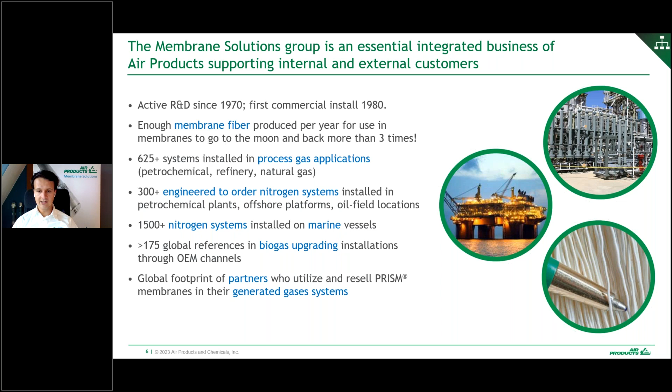While biogas is still upcoming in all the markets, also in the US, we've been active in biogas upgrading and R&D projects since 1994. Actually, even before that, some real pioneers in 1983 did some membrane testing on landfill gas upgrading.

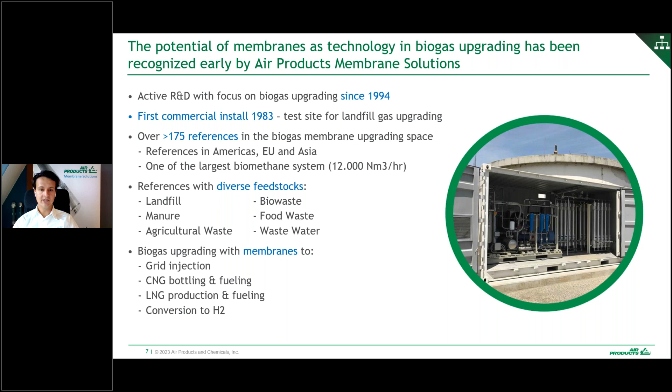The real increase in production and in biogas upgrading started in 2012. We currently have over 175 references in the US, EU, and Asia, with diverse feedstock knowledge: landfill, manure, wastewater, biowaste, as well as diverse utilization. So grid injection, CNG bottling, conversion to hydrogen, LNG production, and one not mentioned here is CO2 liquefaction.

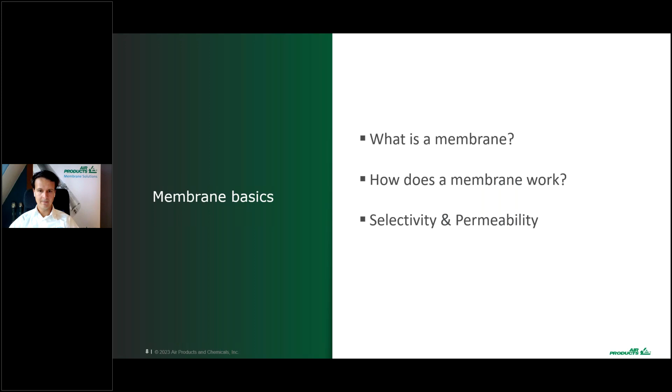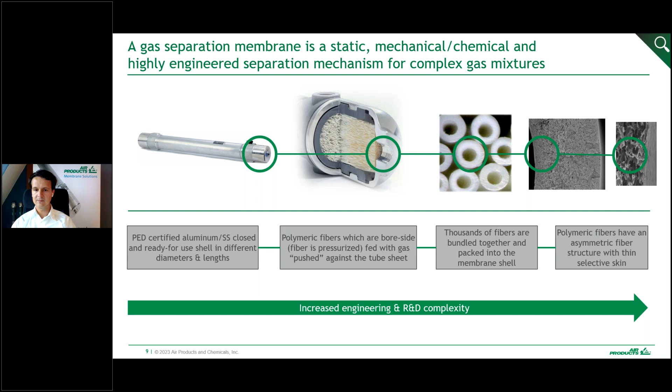Membrane separation is primarily intended to separate methane and CO2 from each other, where CO2 becomes the permeate, on the low pressure side, and methane becomes the retentate or non-permeate. Methane is considered a slow gas, while CO2 is a faster permeating gas. Slow gas means that it permeates very slowly through the fiber and wants to stay in the fiber. A fast gas permeates really quickly through the fiber.

Separation of nitrogen and methane is almost not possible with the current polymeric membranes on the market because they have the same characteristics; they're both slow gases. H2S and oxygen are intermediate gases in terms of permeability, and therefore can be separated at a specific rate. The retentate stays on pressure, and the permeate will experience a pressure drop versus the feed. Next, please.

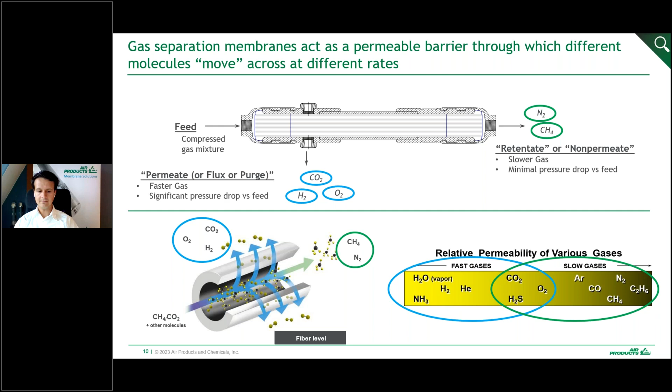The main membrane characteristics are permeability, the amount of gas that can go through the membrane, and selectivity, how good the membrane is at separating the molecules, primarily methane and CO2. To make it more visual, I always compare it to the door policy of a nightclub. A high permeable membrane means there's a big door where a lot of gas can go through. Low permeability means a small door, so you cannot push that much gas or people through.

High selectivity means there's a door policy. They check your ID at the gate and don't let everybody through. With low selectivity, they basically let anybody through, or it's easy to get in. Next, please.

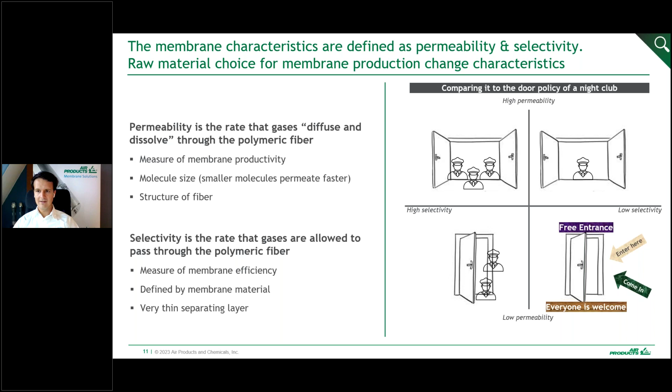These were the membrane basic characteristics in a very quick, high-level overview. However, there are many more variables that make a successful membrane RNG upgrading plant. Those variables are pretreatment, the membrane configurations, because we looked at a per-membrane basis but you need to configure them in a specific setup to achieve a certain performance, and operating variables. So how can I play with my plant to achieve a certain performance? Next, please.

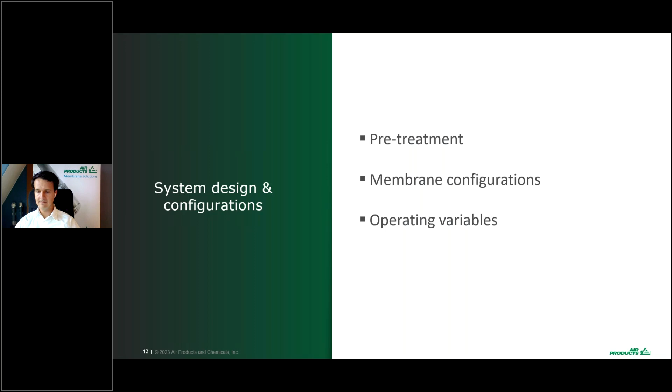Pretreatment is key in the membrane performance. Everybody here knows that the raw biogas is not just methane and CO2. There are many, many byproducts. Among them are, of course, moisture, H2S, ammonia, oxygen, nitrogen, volatile organic compounds like VOCs, siloxanes, particles, oil, and many more that are there in certain amounts.

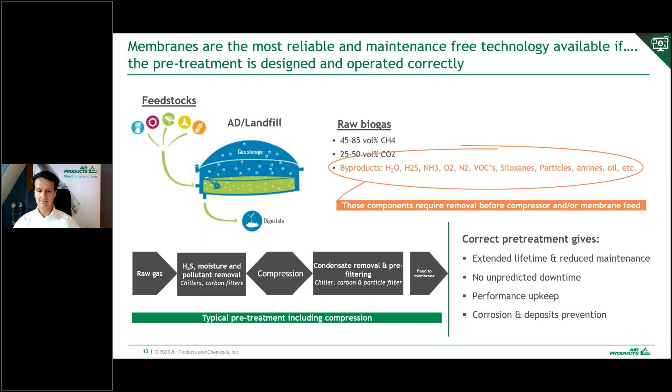However, these components require removal before the compressor, that's a piece of equipment you want to protect as well, and/or the membrane feed. If both components, the compressor as well as the membrane, would fail, then you basically experience unexpected downtime. So it's very important to remove these. Removal of these components can be done by activated carbon or chillers or other types of filter media. Next, please.

Besides the membrane characteristics, the way the membranes are lined up is essential for meeting a required performance. We call the way membranes are lined up a configuration, where membranes are put in stages. A stage can consist of multiple membranes. So if you talk about the first stage, it can be 4 or 5 membranes. A second stage can also be 4, 5, 6, or multiple membranes.

The most simple configuration is a one-stage configuration, which you see in the top left picture. Basically, it is one membrane stage that consists of multiple membranes that separates the methane from CO2. Here the CO2 purity is relatively low, and the methane recovery is relatively low as well. More common configurations are on the right: the 3-stage cascaded, or the 4-stage cascaded on the complete right.

The first stage is always the bulk separation. Here we separate the majority of the CO2 from the raw biogas stream. The second stage determines the methane purity. So what purity do you need? Grid injection? This stage defines it. The third stage actually defines the recovery. So of every molecule I feed into the system, how many molecules can I recover? Any additional stages in series, cascaded or parallel, basically increase methane recovery and methane purity, but they also add process complexity. Next, please.

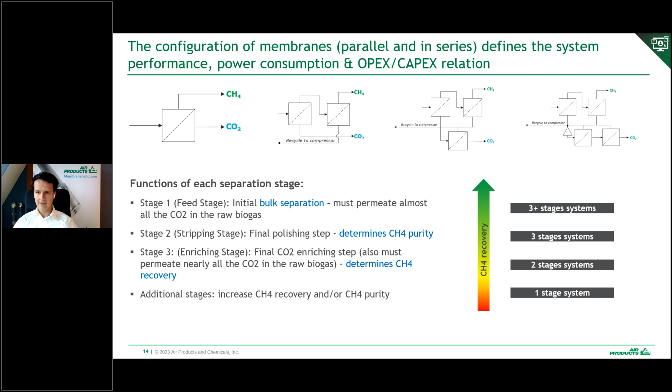Now we've discussed the membrane. So you're going to pick a specific membrane with a specific separating characteristic, say, a membrane with a high permeability and a relatively high selectivity. You picked a configuration, let's say a 3-stage configuration, and now you have an existing plant. These are design parameters you can pick up front. Now you're going to have two controllable parameters, temperature and pressure, and they determine the performance efficiency of the membrane configuration. By playing with these, you can optimize CAPEX and OPEX, so capital expenditure and operational expenditure of the plant.

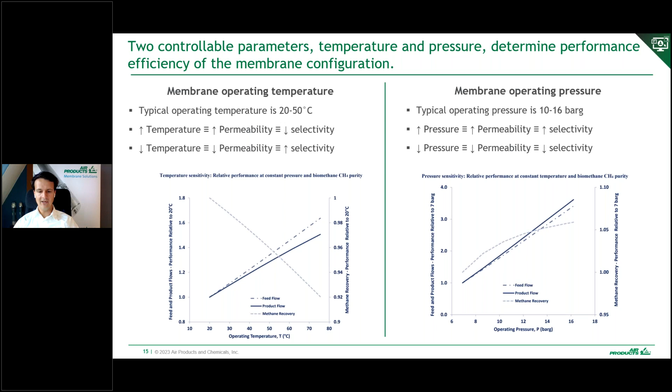The effect of increasing pressure is to eventually decrease membrane count. An increased pressure gives an increased permeability and an increased selectivity. In other words, you reduce the number of membranes you require for the same flow. Temperature, on the other hand, has an opposite effect. Increasing temperature increases permeability and decreases the selectivity. You can make the comparison to pores. You heat it up, the pore becomes bigger, so the molecule can more easily go through the fiber. So more gas can go through it, but the selectivity decreases. So it's crucial to pick the right operating temperature and feed temperature of the membranes in your design phase. Next, please.

Choosing the most efficient configuration. A lot of people ask me all the time, just give me the most efficient configuration. Well, my question back to them is always, define what's efficient for you. It's always a trade-off between operational costs and capital costs. Also, some considerations and factors that can influence your design are, for example, law, legislation, or wanting to benefit from local incentives like the IRA. There's intellectual property you need to take into account. You are limited to a physical footprint. All these factors play a role in making the right configuration for your RNG project.

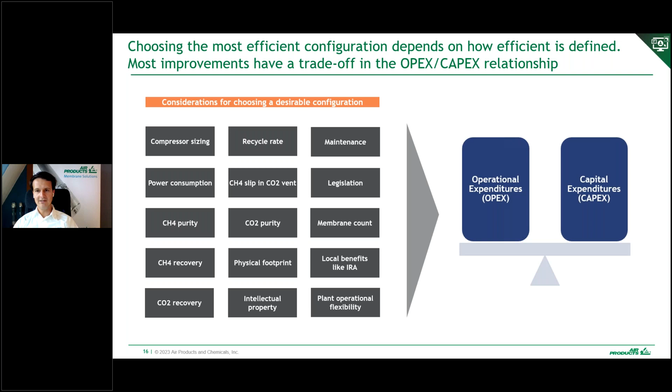So while membrane upgrading is the most dominant technology in both the EU and the USA, with roughly 50% of the RNG projects utilizing membranes, there are many other techniques available on the market that can also be used in biogas upgrading. I'm going to scan roughly through the competing technologies, as well as how they compare to each other. All technologies have a role in the market and they play their part. Next, please.

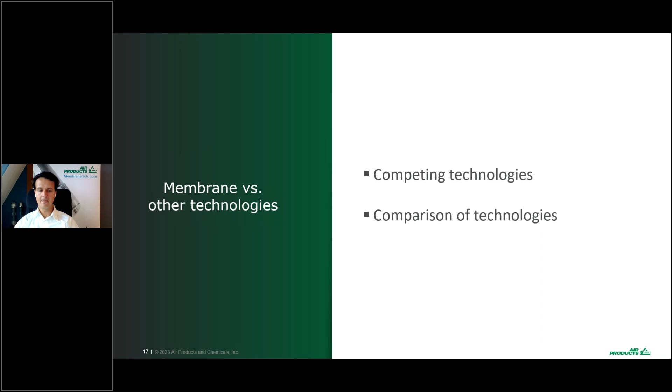As said, the use of membranes for biogas separation has been increasing year on year, in the US as well as the EU and also Asia. Why are people choosing membranes?

While they can deliver the same performance as amines, water scrubbing, PSA, in terms of methane recovery or methane slip, or achieve equivalent performance, the main benefit is that there are no rotating parts. It's a plug and play principle. You get the black box or the membrane, you install it, and there's no rotating parts. Eventually, the performance can be increased and it's the most reliable technique possible.

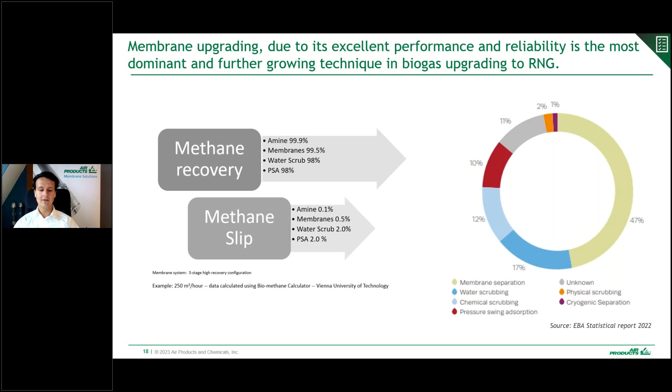Comparing all techniques one-to-one is very challenging, as choice of technique will really depend on the set performance parameters. So as said before, chemical scrubbing has its place. Only, for example, you need catalyst replacement by time. However, it removes H2S, so the H2S pretreatment can be different. Cryogenic separation, it's heavy equipment, high energy consumption. However, no chemicals involved.

PSA, relatively low in power consumption. Removes nitrogen, can remove oxygen, which membranes can't. However, there's a lot of rotating parts, relatively high maintenance. Water and physical scrubbing: there's no chemicals, but you require heat to desorb.

So for membranes, the main differentiator is that it's compact and light, lower maintenance, and low energy consumption. There's also a con: the scalability. The membrane has a certain scale, and if you increase flow, you need to have more membranes eventually.

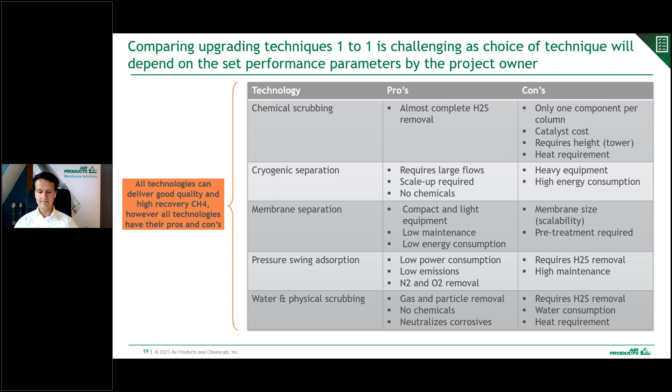Lastly, I would like to show you some examples besides the well-known RNG upgrading plants we all know, and by those I mean 2- and 3-stage membrane systems. However, membranes can also be used in more unique, niche, or hybrid systems to produce, for example, biohydrogen, if that's already a term, bio-LNG, or to achieve a very high methane recovery to comply with emission laws.

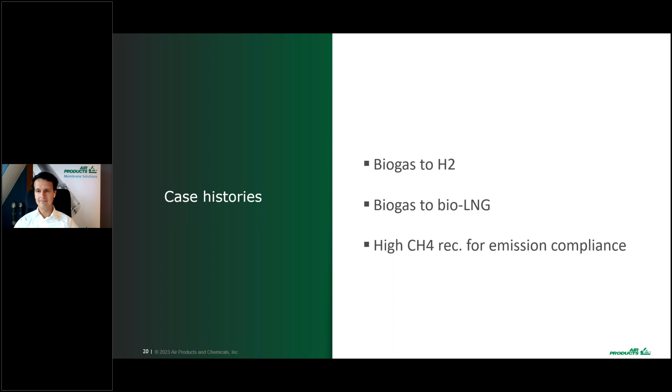So one of the most unique projects we did is located in Japan. It's converting biogas to hydrogen, or green hydrogen. The membrane there produces a very pure methane, and that's directly fed into the steam methane reformer. In the steam methane reformer, they use catalyst, and the catalyst is really subject to pollutants and will decrease rapidly in performance. So it was really key to generate a very pure methane stream there.

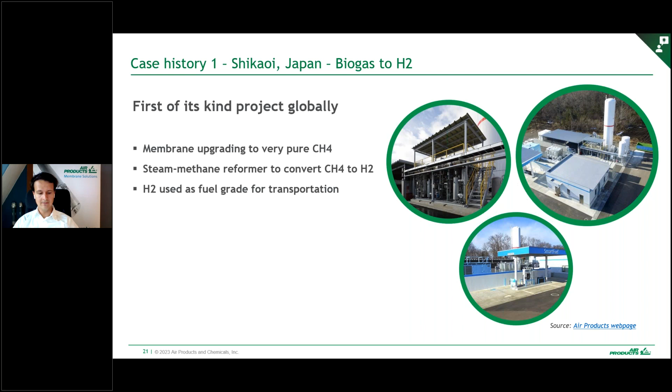And the hydrogen produced eventually is fuel grade and is used for transportation. So it is possible to go from raw biogas to very pure hydrogen. Next, please.

Another relatively unique case we worked on in 2018 is where we supported an innovative startup that had the idea to convert biogas into bio-LNG with direct use of membranes embedded in the liquefaction process. Together with the startup, Air Products Membrane Solutions tested and designed a membrane configuration utilizing an external sweep that provides a very pure methane, very low in CO2, less than 50 ppm CO2, therefore directly liquefiable.

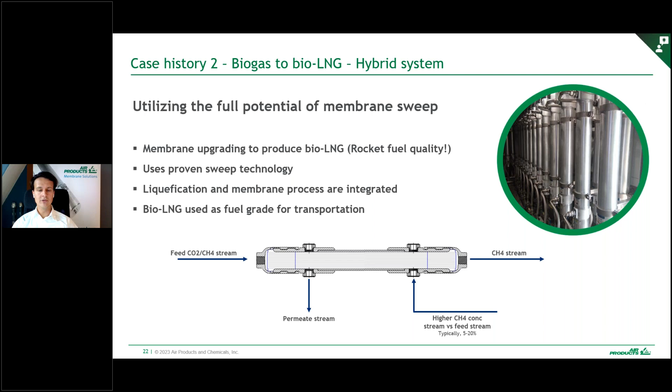Currently, they have one running plant producing 10 tons of bio-LNG a day, and they are building a second and third plant based on this principle. This principle is very unique to our product and to production of bio-LNG. So it's possible to go from raw biogas directly into liquefaction using membranes. Next, please.

Another challenging case we worked on in 2019. In Europe and certain parts of Germany, the emission laws are very strict in terms of methane emissions, where generally 0.5% to 1% of methane emission is allowed. In this particular region of Germany, only 0.1% methane emission was allowed, meaning our design needed to recover 99.9% of the methane.

This is possible with a standard 3-stage system. However, the power consumption skyrockets with a 3-stage system. This is mainly due to a very high increase in recycle. You're basically taking more gas and feeding it back to the compressor.

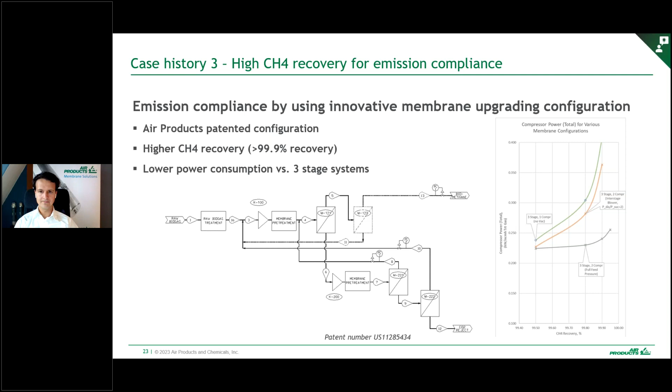So what can a membrane do for you? A membrane in your RNG upgrading plant can give you a reliable, safe, and competitive plant, competitive in terms of reliability as well as energy consumption. Next, please.